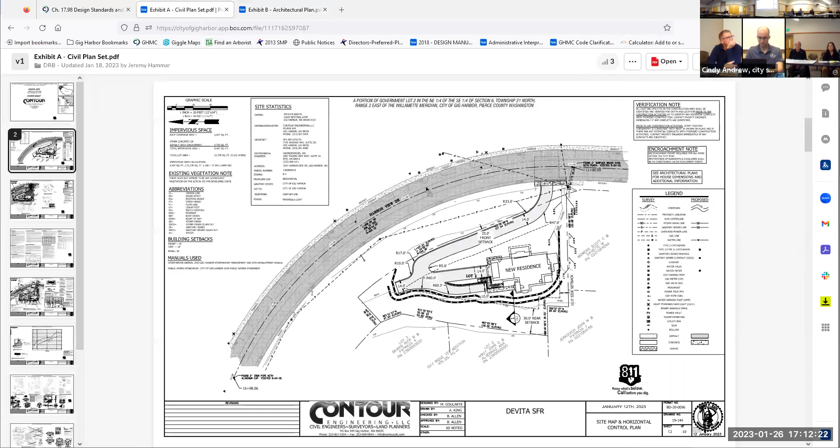It has two stories, a little over 2,600 square feet built. There are elevations of it, and there is a full site plan that shows what's going on there.

The driveway approach had to be done in such a way that EVA could access it, so that's why we have the length we do, plus we have a turnaround. So we're meeting all criteria in terms of emergency access.

One of the things I want to point out, I brought a board along because it's hanging around the office and it seemed like the perfect one to show you. Here's the site. This red line across here is in fact this section down below here, and you can see where the existing grade is dashed in, and that is proposed.

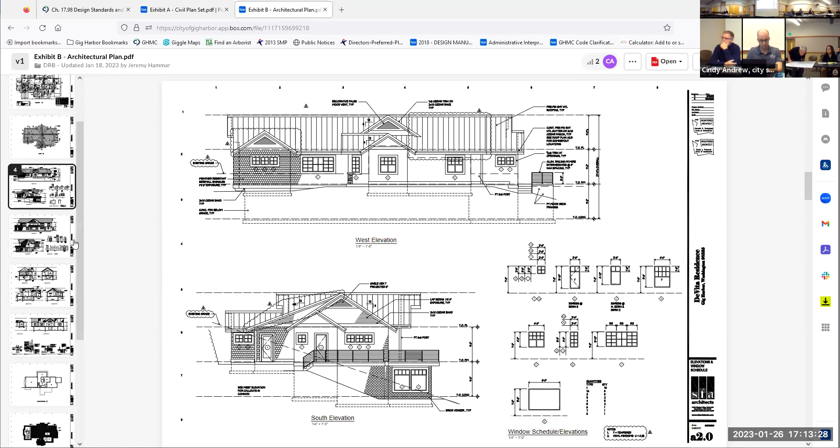We minimized as much as possible any portion of the building being built or designed in such a way that it would go further back into the slope. We massed everything in a horizontal dimension.

In terms of trying to mitigate this situation with not changing the grades and not exporting material, we are proposing to distribute about 1,000 cubic yards over the site. That is the site that is owned outright by Jocelyn.

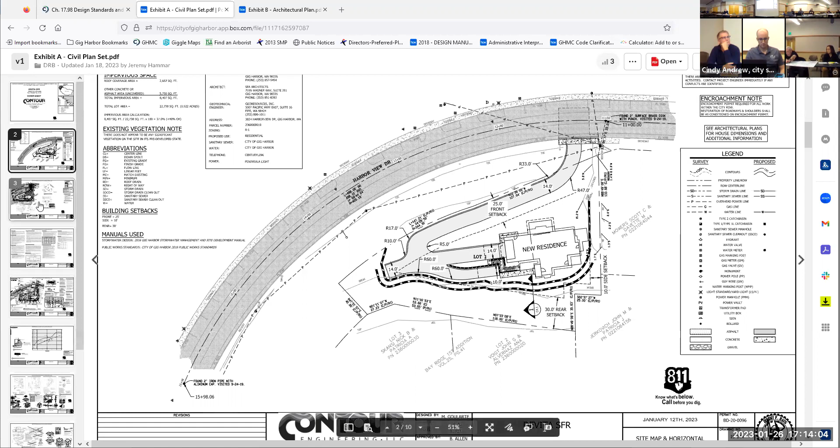It'll be the base for an additional topsoil layer for our landscaping, which will be primarily grass—not your typical green grass, but a different kind of landscaping.

So that, from my standpoint, is where we were and what we tried to do with this, coming up with the best possible result. And getting down to this decision tonight...

I walked through the decision for the exceptions provision and the criteria for approval. There are six criteria, and if you've had the chance to read through that, I don't need to read the whole thing, but I can tell you that, in my opinion, this particular house, this design, and this site are all characteristic of what the criteria for approval require.

I firmly believe that. The design process was difficult in respect to finding the optimum retaining wall system we could use on that site. So it wasn't just a large wall, it was a stepped sequence of walls.

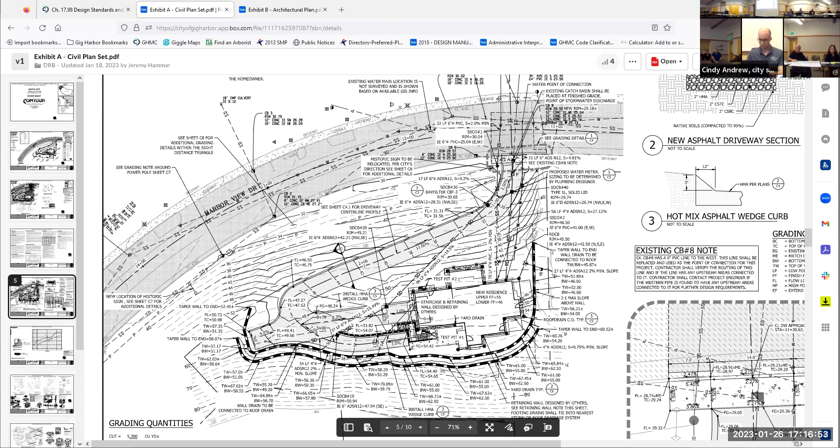We had done a bunch of explorations down in the lower portion where the house and the driveway are proposed, as part of our original studies. During the development of how to make the best cuts and stabilize the hillside, we were able to get access to one of the upland properties above the DeVita property and do a deeper boring, so we were able to characterize the slope above the house as well.

We looked at terracing the slope between the house and the properties above it, using the requirements of the 6-foot retaining wall system. Because of the steepness of that slope and its height, at one location we had up to five different walls, so you'd have significantly more impact on the slope above, a lot more cutting of material to get the walls built—so it would have been a lot more disturbance.

We also had to look at how construction of the foundation for the house would come into play, because as the house steps down, your foundation members get excavated into the hillside. So you had to worry about temporary cut slope requirements for both the city and for Labor and Industries, how those would be made, and the constructability of the site.

We worked with Contour Engineering, who was doing the layout for the road, and had to maintain the slopes for the driveway and the turnaround areas.

That posed another question of how to just get the walls in there. So the system we came up with is a two-tiered wall system. If I recall right, the lower wall is going to be a driven soldier pile wall, so we'll minimize excavation behind the wall and won't be cutting into the hill as much. It's a top-down construction, so as they drive the piles, they'll be able to excavate down, so they're not opening up more hillside than they need to. During construction, it creates a safer build.

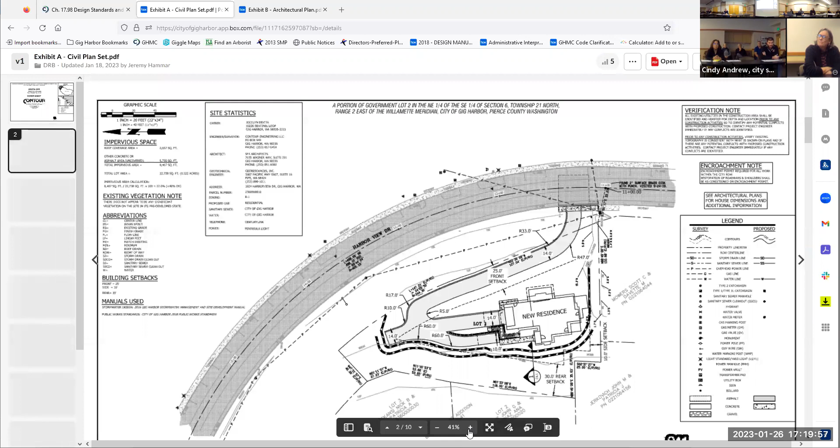We're left with kind of one spot to place the house, and that house with existing grades is—I'm not sure what the height is off the top of my head—but it's at least 15 feet higher than the road. The road can only go up so steep, so we're minimizing slope for vehicle access.

But at the same time, we're having to create a cut scenario, and that's why that wall is there at the back of the site. There's also a sight distance condition, or problem, where the existing driveway is with the curvature of the road, so there's additional cut coming out of that area.

But given all of our constraints, we're trying to minimize wall heights and cut material and export as much as possible. There are also limits on where that house can be placed height-wise. So there are a lot of different factors that go into it, and from an engineering standpoint, we're trying to minimize as much cut and impact to that hillside as possible.

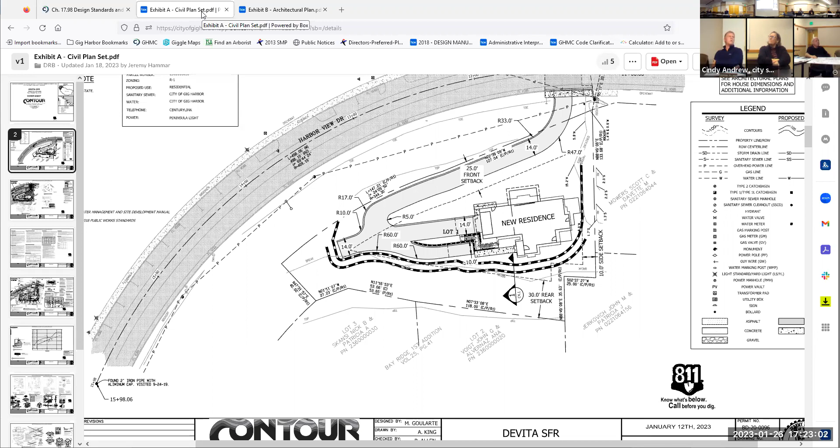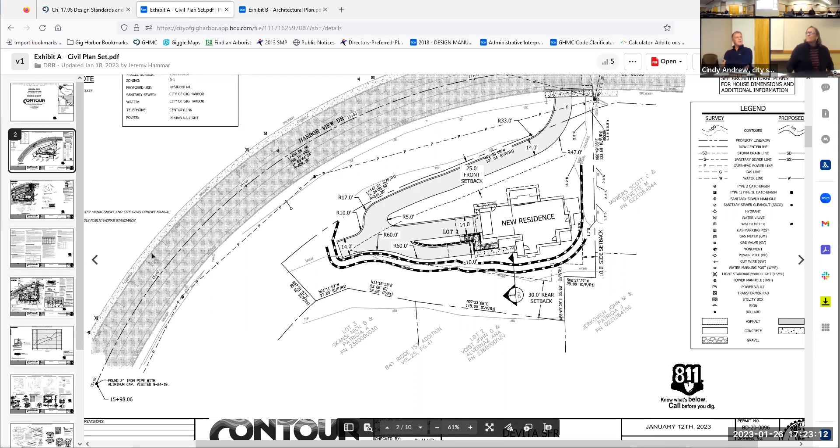I think you've explained, and I understand well, why you've gone with the two-wall system as opposed to looking at creating more walls at, say, a 6 foot or just under, just because of the amount of manipulation of the existing grade that's there. So I think I can understand that, I can empathize with that a bit.

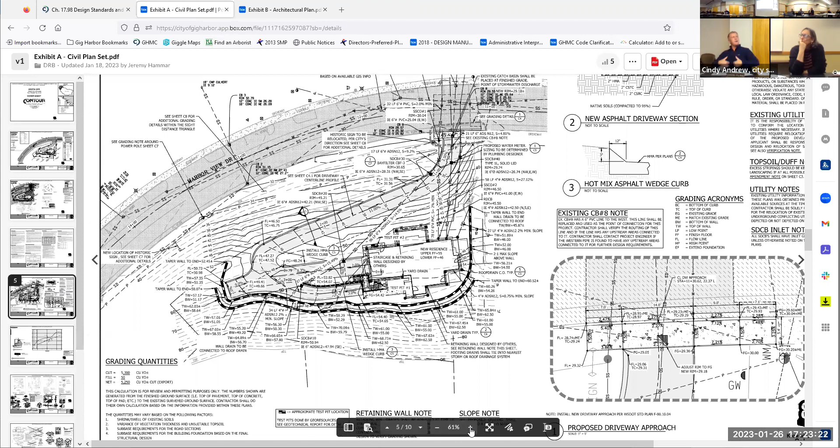So my question, maybe to start with, is of the walls that extend out around the house that have the potential to be more visible, can your team describe for our members what are the grade elevations, top of wall, mid-level, what's happening down below? So like how much wall are we talking about being exposed? Again, I think it's probably...

more reasonable to think about the walls as they extend out and become more of a landscaping element. The house, in my opinion, shields a lot of the wall, and in essence is as tall as the structures that run right behind the house. So maybe we can talk to that a little bit, specifically the numbers, since everybody usually asks those anyway, so we can see what we're talking about.

Yeah, so as far as numbers go, the highest part of the wall is going to be on that back-behind-the-house section. Then as we go around the sides, basically what we're doing is tapering it off to match grade, so we don't extend it down any further than we need to. Once you get past the turnaround on the north side, that's where grades start to peter off, and it'll look like a wedge almost, matching down to existing grade. If you're standing on the road looking up at the side, it's creating sort of an amphitheater type scenario, where on the sides you've got a triangle or taper down to existing grade.

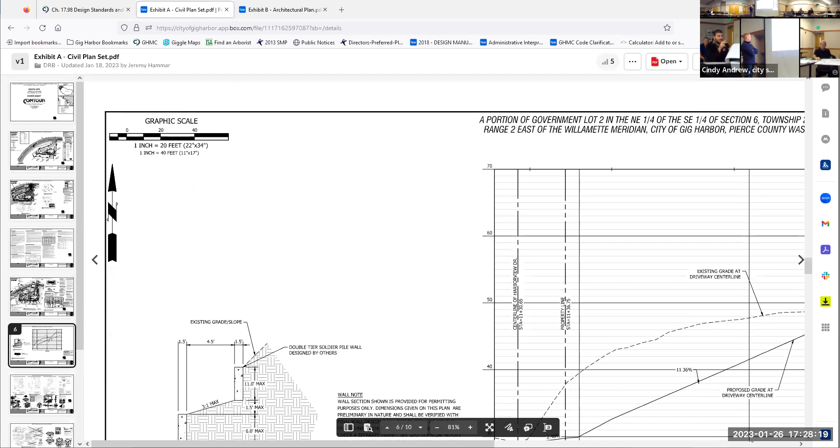The way we've designed it is that if you go to the left side of the page - that one right there - that first wall we designed so that it's a maximum of 6 feet tall. And then the second tier above it, we've designed where it varies because the topography around it is just changing, but max height of that wall is going to be 11 feet. So you've got a maximum 6 foot wall and then a max 11 foot wall - total wall height is a combination of those two.

And then the idea, just so we can visually describe this, if we're trying not to disturb this grade upland and that 30-foot rear setback, if we wanted to minimize this, that means we need to raise this wall, or have another one, or start encroaching on the buildable area within the lot.

So I think the conversation, maybe speaking to Guy's original comment, is we always balance how much we're impacting the site versus, in my opinion, and I'll speak for my fellow members, the house is very modest, not very big. So if you were to consider three walls here and move that buildable area, I think it's rendering the site almost unbuildable. You'd have to either have walls down on the lower part of the site.

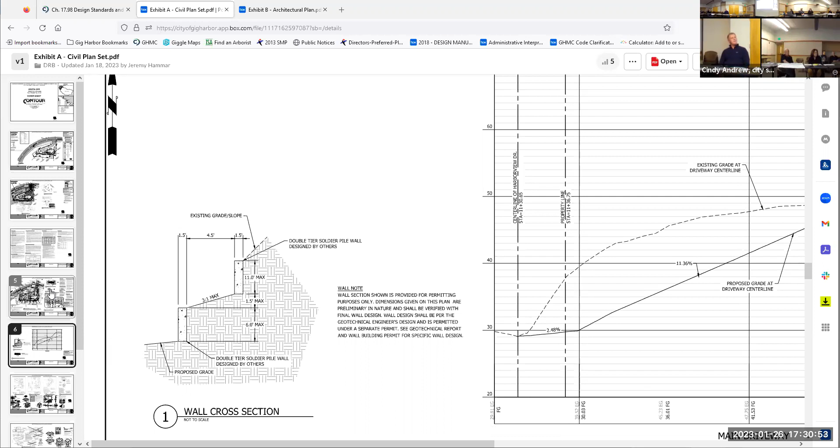I'll stop for a moment and let everybody else chime in. I'll offer it up to other members. You guys got some comments you want to fire off, go ahead. I'll jump in a little bit if you want.

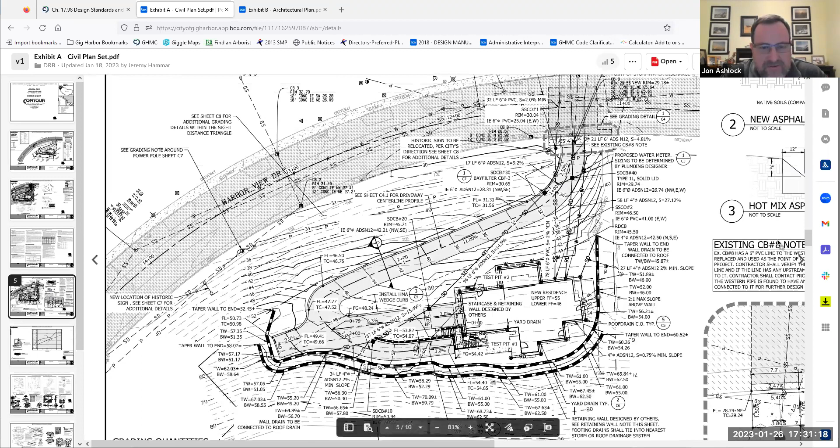Thanks, Jon. So one of the biggest questions I have is, we know the house is up - I think you said the top of the driveway is 12 or 15 feet off of the primary road. So what would be the view of the walls from Harbor View? That's a perspective that's kind of hard to see. Do we have vegetation that's blocking access and view from it somewhat? Is there other ways - what is the public right of way truly going to see when the house is elevated up that high off the primary road?

That perspective is kind of missing in my mind's eye. And going with Darren a little bit on the walls - retaining walls, it seems like every single meeting we have is talking about retaining walls. The stepped one could definitely work good when there's vegetation in between, which blends it out. But having an 11-foot wall on the upper section, I think it's going to be hard to blend it and make it disappear more.

So I think the perspective's missing in this presentation right now, so we kind of know what the public truly is going to see when they're driving down the road and looking at this. The house itself, truthfully, I think is a very modest house, and it looks nice and ties in. The other question I have on the cut and fill is, what is this going to look like with the neighboring properties? Are we talking a humongous scrape out where you're driving around the corner and suddenly there's a big clamshell cut out of the hillside? Or is it going to blend with the other properties so it's not sticking out from adjacent properties? So those are my questions.

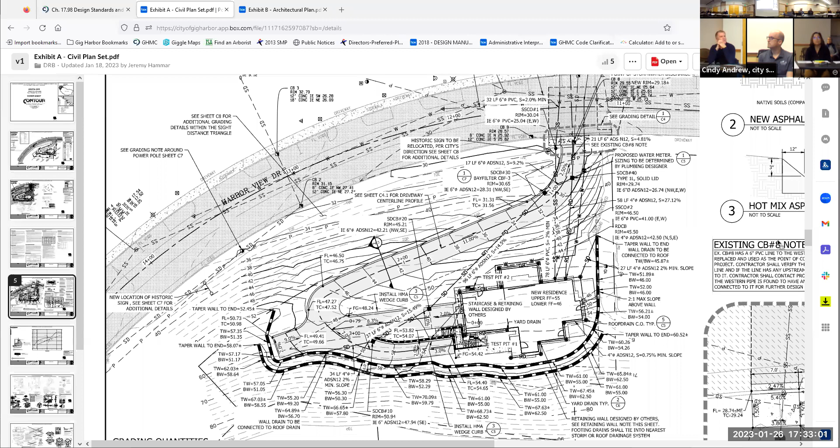Well, yeah, I agree with the comments just made previously. Even those of us that think we can see in three dimensions pretty well, knowing the site as well as I do, I have a pretty hard time visualizing it. I think a six-foot figure on the sidewalk across the street, an illustrated view of what this would really look like, is in order here, because you know how it is - people can look at a plan view and get a sense of size and scale, but unless you have an illustration of the finished product and the walls in particular... I mean, I like the house too, it looks fine.

I'm a little concerned, and I'm not a geotech guy, but that hill has been known as Clay Hill ever since I was a kid. And I know it's created problems across the street for various projects. So I might be nervous about the retaining walls there.

Anyway, I think it would be really valuable, not a bird's eye view, but a 6 foot view from the sidewalk, to have a rendering of what we're looking at in plan view there. I agree with Guy and the other comments. The house itself looks fine, but it is hard to visualize the site.

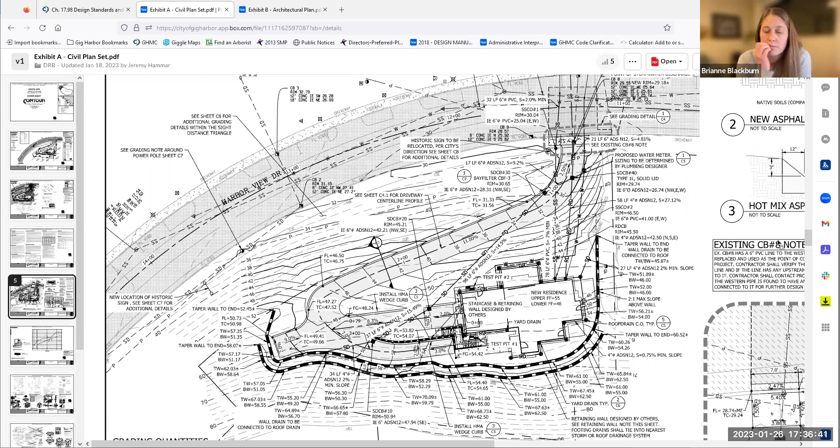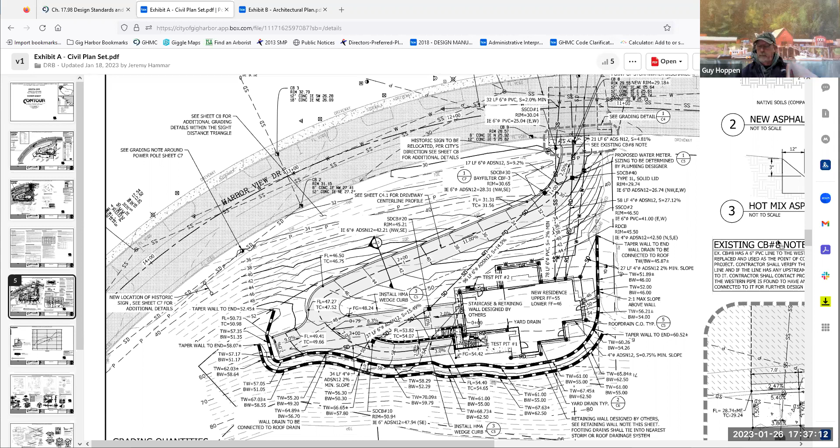So, one confirming question: what is the intended size of the house itself—2,400 or 4,500 square feet? 2,600. Okay, thank you. There was an error in some of the presentations, so I wanted to confirm that. So is that the footprint or both levels? The footprint's even smaller than that, just a little over 1,200, somewhere in there. Yeah, extremely modest, in my opinion, very modest. It had to be to get it in there.

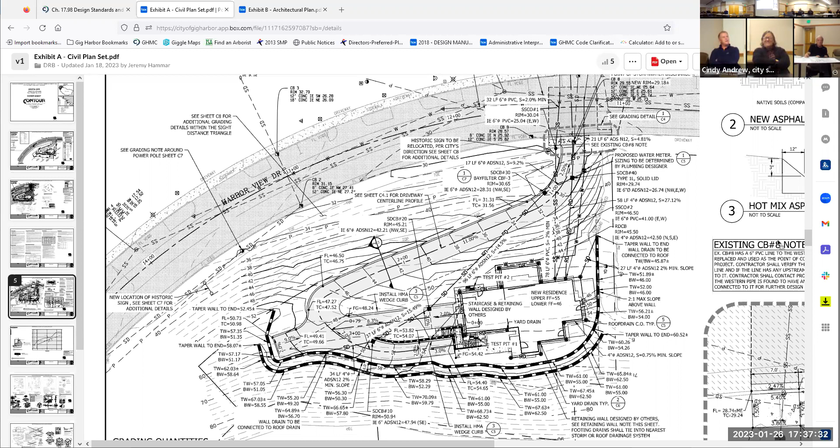Okay, if there are no other questions, I would say that at this point in time, reading the tea leaves from the members, we couldn't probably vote on this without having some more information. And I hate to, in essence, defer it to a later date, but it sounds like most of the members are in accord with trying to see some visuals, since it's so challenging to interpret this much grade change and what that perspective will be from Harborview.

So if I've heard everybody correctly, I think I would make a motion to ask the applicant to consider putting together a series of perspectives from Harborview that describe how the walls would look in combination with the house, and possibly even a year 1, year 2 landscaping plan thrown in there, maybe not fully mature, but in essence what we could expect to see in that first year or two.

And again, we're not looking for realistic, high fidelity type renderings. It can still be a bit sketchy in nature, but accurate enough to convey what the intent would be. I know we could have used some of those things for some of the other public works projects, and we got those when we asked for them.

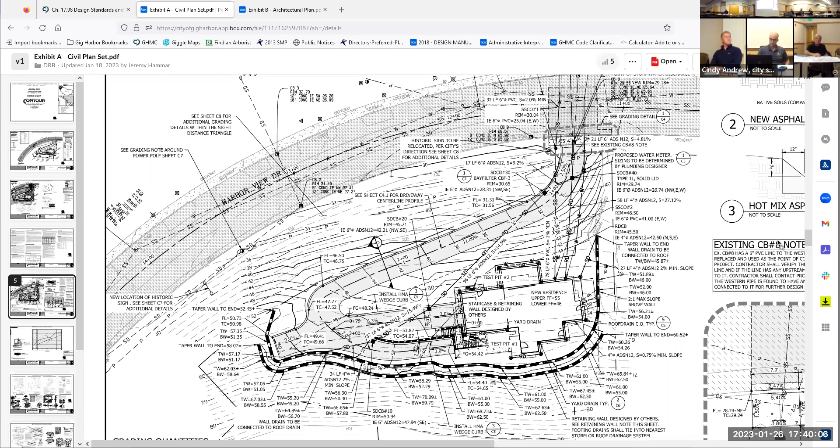Okay, so yes, we can have those ready. I can't give you a date certain, but I can tell you I can have it rather quickly. So I'd ask, I don't know if we have to necessarily vote on it, but the members are in accord with that request of the applicant. You can shake your head if you want to, and we can say we'll send them back to do a little more work. We'd appreciate that.

Hey Darren, my only other comment would be both directions on the road. And I appreciate your calling out the landscaping as a piece of that too. I was looking at the landscaping plan, and I think we would benefit looking at both together as much as we can. I think that'll really help inform what that visual will be. So yep, I appreciate that.

Do we know if the city has ever had plans to put a sidewalk on the opposite side of Harborview? You don't know, okay, so certainly ask that. All right, so I guess what we're considering is the sidewalk opposite, since it's the only one that exists right now. Okay, so with that said, I think no more questions from DRB, applicants presented, so if we have any public members who want to make any comment, now's the time.

I'd like to know a little bit about the water flow from up above going through this lot. Let me pause for a second. If you'll state your name and address for the record, would be great. Okay, John Boyd, 8405 Bay Ridge. All right, thank you, go ahead and ask your question. I'd just like to know how the water flow is going to go from up above through this lot with the retaining walls. Has that been considered in design?